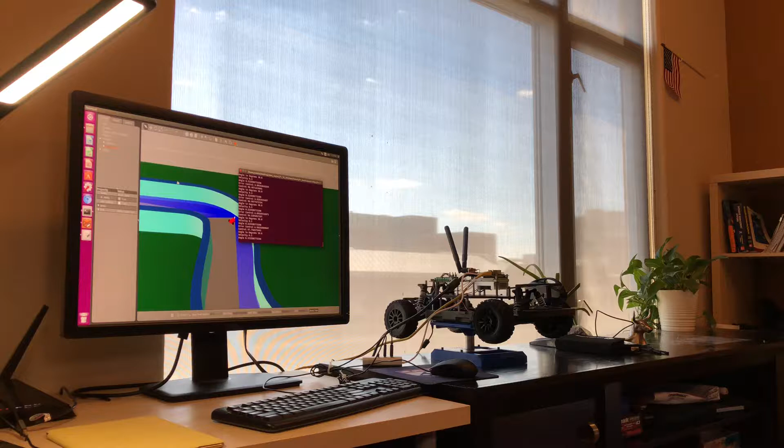Hi, my name is Christopher Cal. I'm going into my second year for robotics master's program at Penn. And I just want to talk about this, my first exciting week working on the F1/10 racing car.

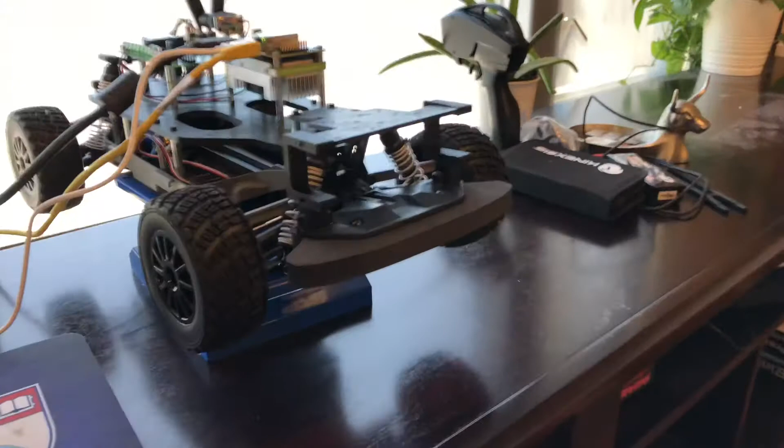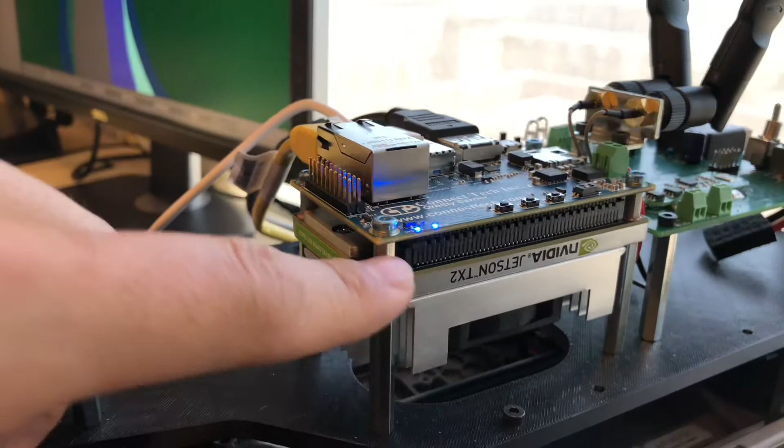So let me just show you what it looks like first. It's almost completed, but not entirely done. This is the F1/10 racing car right here. Basically it's using a Traxxas chassis on the bottom, the Traxxas Rally 4-wheel drive. And then on top of this, we have an NVIDIA Jetson TX2, which is this, and here's a carrier board on top.

The TX2 is about $600, my education discount is about $300. The Orbitty board is about $200, which allows you to plug in HDMI and stuff, and you actually see it on the monitor, which is super cool.

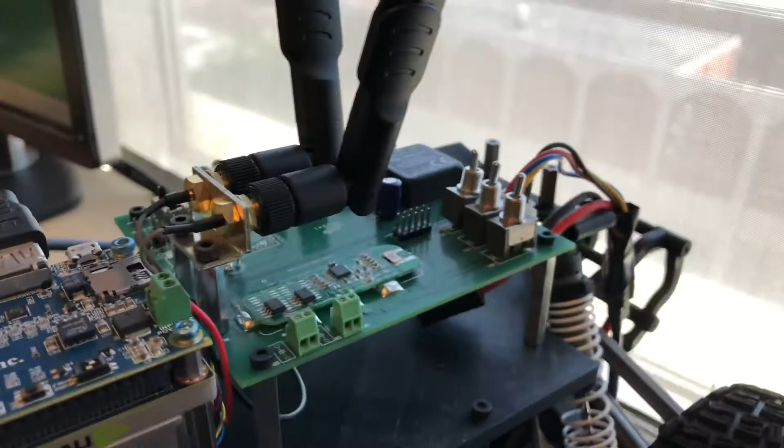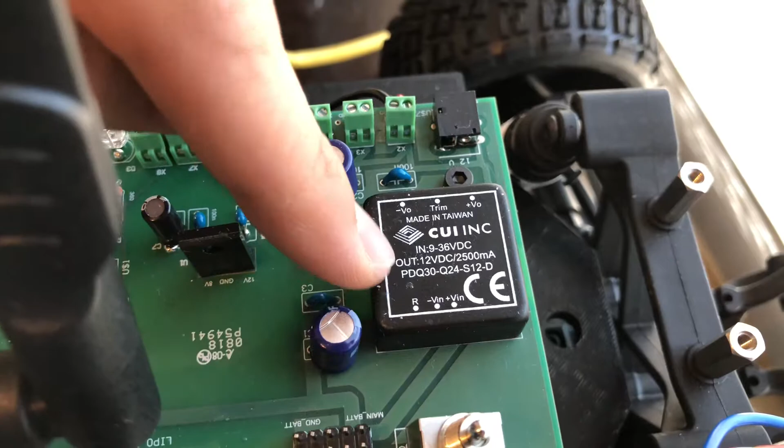Over here is a power board, which was soldered by members of the F1/10 team. Essentially what a power board does is it takes in power from DC, from a battery. In this case, I'm doing it from a wall plug, and converts from anywhere from 9 to 36 volts to 12 volts output. The reason why you need 12 volts is so they have a steady stream to the Orbitty carrier and the NVIDIA Jetson board.

On a normal battery, it's supposed to last about 6 hours for the computer. Although sometimes it's 3, sometimes it's more, so it's better to just plug it into the wall for debugging purposes.

So I wanted to just talk a little bit about some of the things that I've come across, some of the challenges. I've literally prepared this entire list of things to talk about just because it's very overwhelming sometimes to think about all the things that F1/10 is.

But before we get to that, let me just show you a little bit about what F1/10 is and why I got interested in this. Right now, by the way, is mid-June of 2018. So I'm on campus over the summer and got the opportunity to join the team.

The bill of materials for everything can cost up to $3,000, but the LiDAR camera is about half of that, and I'm not planning to use one of those.

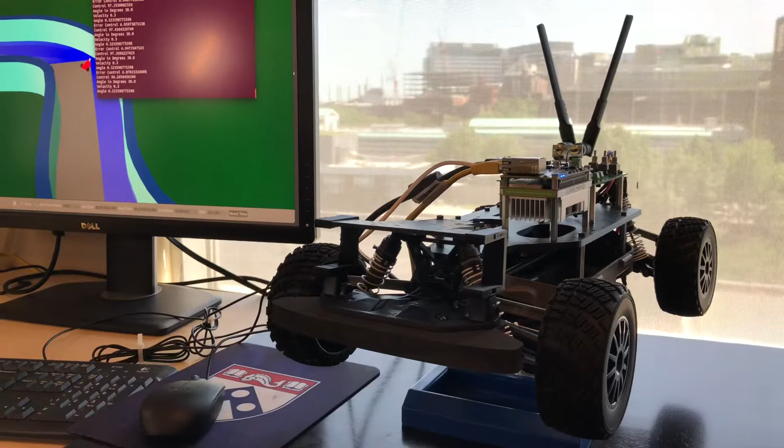What I was really interested in was I was at an NVIDIA talk where I heard researchers putting a camera, just a single RGB like webcam, kind of like this type of camera, right on top of the car, and basically training a neural net. So the car would be going at constant speed, imagine that, and you just store, when you train it, how many degrees to left or right given the single image.

And this was a project called Dave, made about 10 to 15 years ago in the early 2000s. It's been very successful in the backyard. And NVIDIA sent in with the actual car. They've actually trained it on about 100 hours of driving in all types of weather conditions, and they've actually gotten it to work.

In their case, I actually talked to one of the researchers there over the phone a couple weeks ago. And they actually did need some more sensors, like sonar in the front in case someone stops. They had a separate sensor for detecting stop signs. So it was not as simple as it may seem, because there are a lot of other things as well.

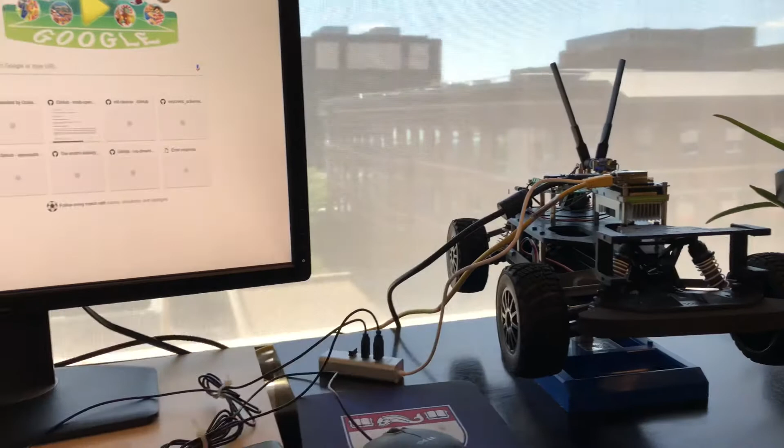But it's just very interesting for me because as a robotics student focusing on a lot of computer vision and machine learning, it's cool to be able to actually see it implemented in the real world as opposed to just like numbers on a screen when we do these machine learning projects.

So let me show you a little bit about what this simulator is. Basically, this is a simulator using the Robot Operating System.

Before I get there, let me tell you what's on this NVIDIA tech board. It took me about a week to build. I bought the chassis last week when I was home in California and brought it over. I was so excited, and I've had a couple of Traxxas cars before, so I know how much of a pain it can be to fix when it breaks. These are called caster blocks and other parts. When they break, it's such a pain to fix because you have to take apart so many pieces.

So that's why I don't want to drive the car yet using any software. One, I'm just starting to learn ROS. Two, I'm definitely going to make a ton of mistakes. And three, it's going to be a pain.

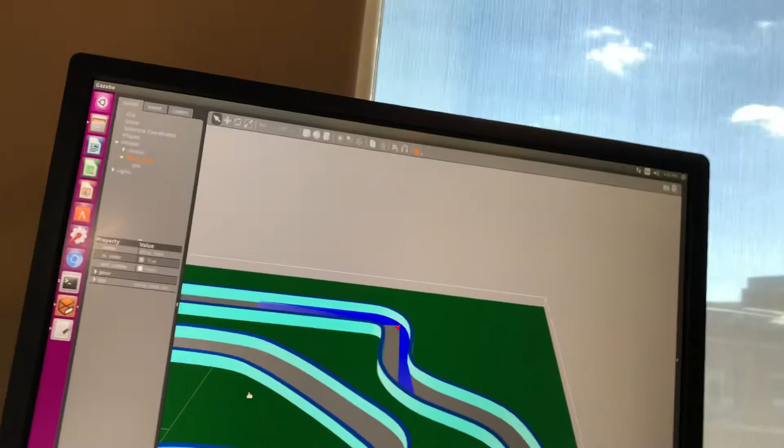Even here, if you look at this, this is literally a simulation, and actually the car crashed after a couple minutes. This is just doing simple wall following using Gazebo, which is part of the ROS operating system. It's a simulation tool. This is like a Barcelona track, and you're able to see around while the car runs by itself.

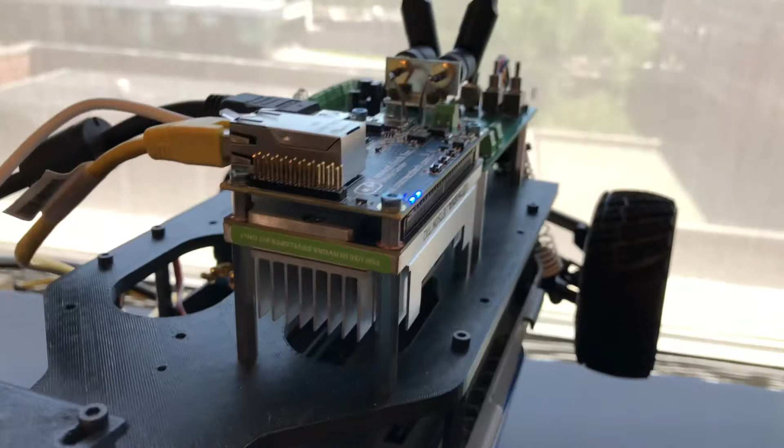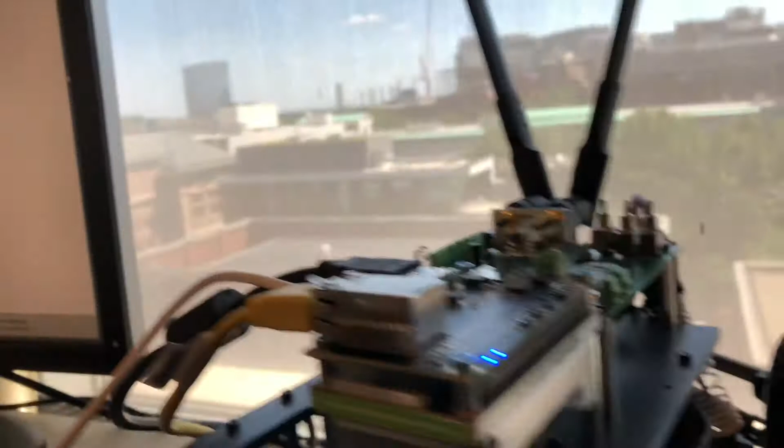In terms of what I'm doing about ROS, this is basically what it kind of looks like, and again this is very simple still. This is running Ubuntu 16.04 LTS, using ROS Kinetic, which is a slightly newer version, not the newest, but newer than Indigo. I was very worried about compatibility issues because I'm using the TX2, and a lot of the tutorials I found online were all for the TX1, which uses 14.04 with Indigo. So I was worried about that, but it seems to be okay so far.

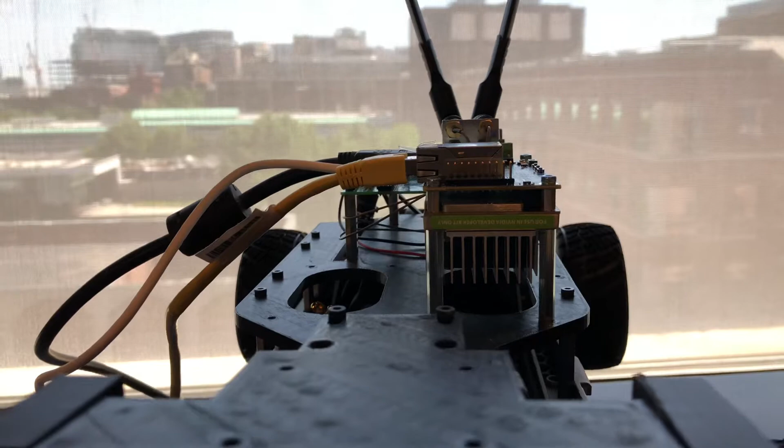It's just been so cool. At least for me, coming from a background with a lot of computer science for undergrad and mostly programming, I haven't learned soldering skills, I don't know how to use a laser cutter, and I'm learning all this stuff now. It's just cool to be able to combine things together and actually do something cool with computer science outside of just data structures.

They can be run with either Python or C++. I'm really happy if I can do stuff in Python, because I haven't done much C++. I've done a lot more Python coding, and especially later if I want to do the neural network type of thing, I'll probably need to write in Python, not C++. So that's just really cool.

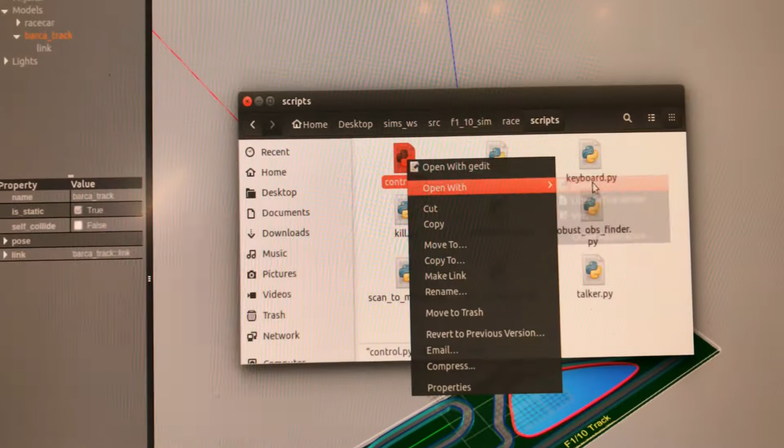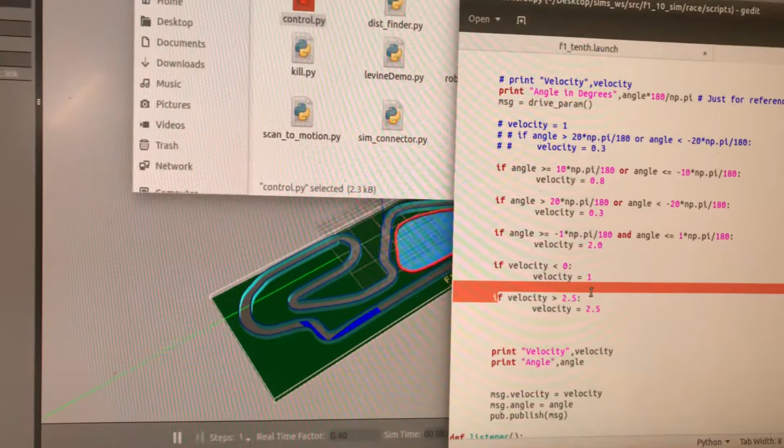If you look at a file like this, it's all on GitHub, so nothing proprietary. Control.py is like, how do you control the car? I still don't understand a lot of this, so I hope it doesn't sound like I do, but control seems a little hard coded. It's like, if the angle is greater than that, then do that; if the angle is less than that, do that. If the velocity is... this is actually commented out... if the velocity is greater than 2.5, basically you set a maximum velocity of 2.5.

There's just a lot of little things in here, and I guess it publishes a message. In ROS, the robotic operating system, each node publishes messages to a topic, and you have listeners. So I guess this would be considered a node, the control node, because it's publishing messages with a velocity and an angle. In many ways it's kind of like JavaScript, because you're having like a JSON. You're setting a velocity, setting an angle, and then publishing it, which is kind of like a POST request, and then you have someone getting it, like a server doing a GET request.

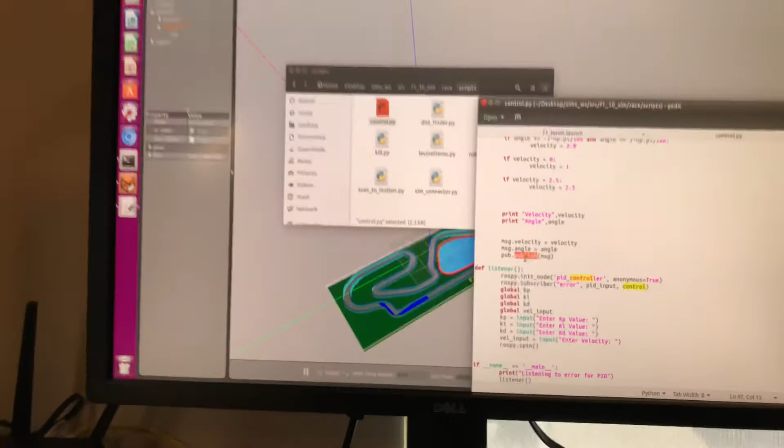So this is super cool. I want to show you a little bit about how the terminal stuff works. This is just running the simulator right now. But something I found pretty cool is that in ROS, every time you start it, you have to run something called roscore, so I ran it up here. It's basically like the master server that helps all the different nodes communicate with each other. This is all stuff I've learned this week.

I literally have this stack of papers on my desk. I'm just learning a lot, and sometimes it's overwhelming, there's a lot of stuff.

The F110 website was great because it had a lot of tutorials, so I went through basically almost all of them: Intro to ROS, look at those notes, Intro to the Jetson which is the NVIDIA board, and Robot Operating System part 2, using nodes, catkin make.

These are a lot of papers that I found pretty interesting. I haven't even read all of them yet, I've only read like one of them to be honest. The one I've read is the NVIDIA paper, I'll see it right here - it's the end-to-end learning car one, but it's not this one. I'm not exactly sure where it is right now, but I'll try and find it later to show you.

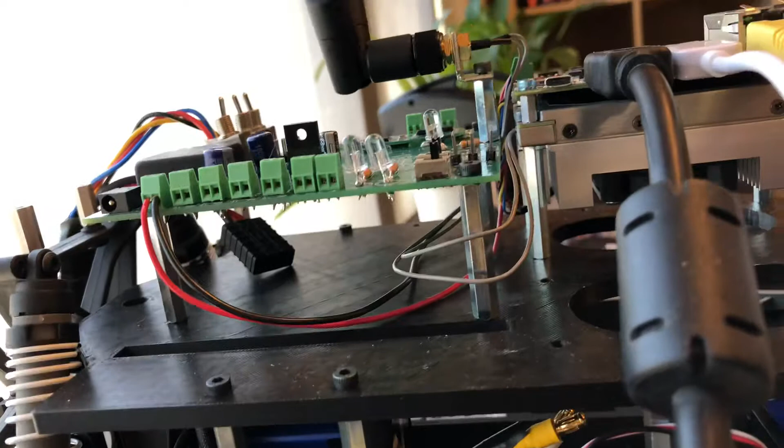You look at the hardware here, it's really interesting because we actually stripped out a lot of things. It's using a brushless system, and it's best to use brushless because it has 3 prongs, which works with the VESC. A VESC is basically an electronic speed controller. I'm still waiting for mine, and I'm in no rush because I don't want to drive this anytime soon in case it crashes. But a VESC basically allows the board to communicate over USB, probably through a hub or something, because it only has one USB port, in order to get odometry information, tell it things.

It's being used by electric skateboards, like the boosted board. It's used in a lot of new technologies, it's supposed to be a big breakthrough, and I don't really understand why yet, because it seems like the VESC is something that we should have had a long time ago. But I guess with the advent of these microcontrollers, it's just made it more possible to send very fine-tuned messages.

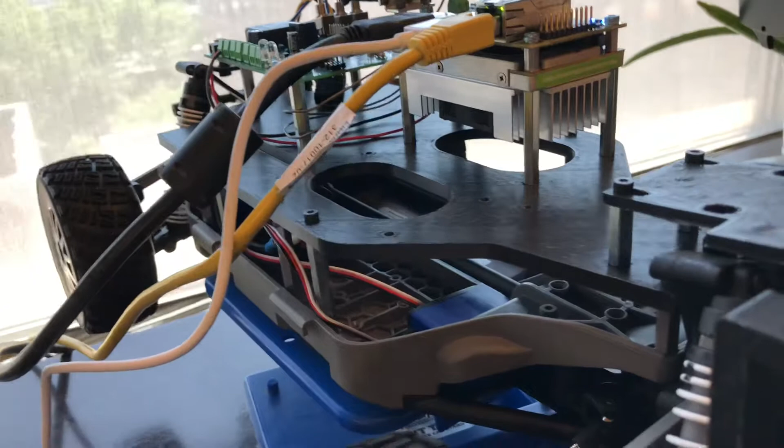So we actually took out the receiver, and my friend Jack actually helped me out. He's the same year as me, also going to sub-matriculation, he's helped me out a ton building this. These were 3D printed, and normally they're laser cut, but I was at Penn, had an ad lab, and got it printed, so that was cool. This one I printed at home because I got my little brother a 3D printer, and I printed it last week when I was in California because I was just dying to build this.

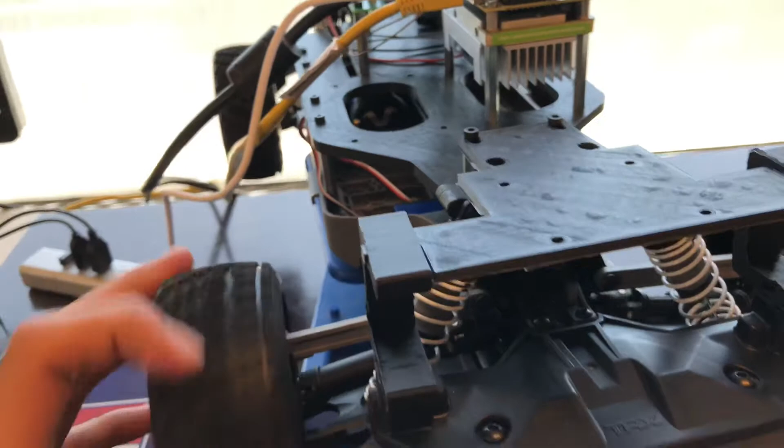So you'll see here, we took out the original electronic speed controller, don't even have a need for this because the receiver is stripped out. And the way for people to manually override when this is driving is, instead of using something like this which you can use a computer to control, we will actually use one of those gaming joypads by Logitech, which is in the lab right now, and use that to drive this. The bottom is a really cool plate which allows me to just turn the car.

If you really just step back and think about it, how cool is it that our car is a computer that is driving a car that is simulating? It's insane. Some team members have told me not to run the simulator on the TX2, but so far it's working pretty well. This computer's got 8 gigs of memory, it's pretty powerful, and it has CUDA cores, and honestly I think it's probably more powerful than my MacBook Pro, if not around the same. So I think it's pretty damn impressive.

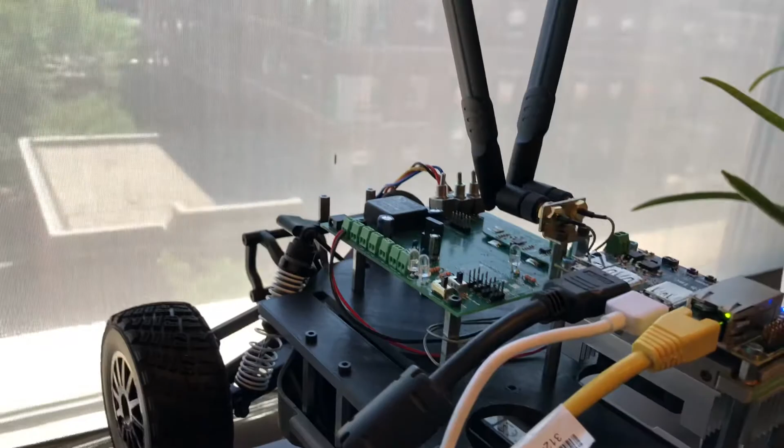So this is the simulator, let me just minimize this. Basically show you this - it's funny because when the car crashed, it actually keeps going like that. But let me put the camera down and just talk you through some of my thoughts, some of the challenges that I've seen. It's about 12 minutes into the video, but there's a lot I want to talk about. Let me just make sure it's going correctly.

So I just want to talk a bit about how excited I've been this past week. Literally a week ago, or 2 weeks ago maybe, I was in California just driving normal RC cars, Traxxas models, which I've had for a long time. And this summer I was planning to continue doing my drone photography with Philly by Drone, but I was feeling very bored and a little empty inside because I've been taking so many robotics classes and I wasn't applying it in any way. And I know that next year I'll be taking about 4 master's classes a semester, where normally students take 2 or 3, plus I have some undergrad classes.

So it's going to be a ton of work, and so I wanted to get a head start. I debated about maybe doing some research over the summer.

Maybe some research just to get a course credit for the engineering thesis for my undergrad. I was lucky enough to find out about F1/10th because I saw it in February at a conference at Penn, an industry symposium, where I also met those NVIDIA researchers doing the self-driving car. I just thought it was really cool because it's a way to apply a lot of the things I'd learned.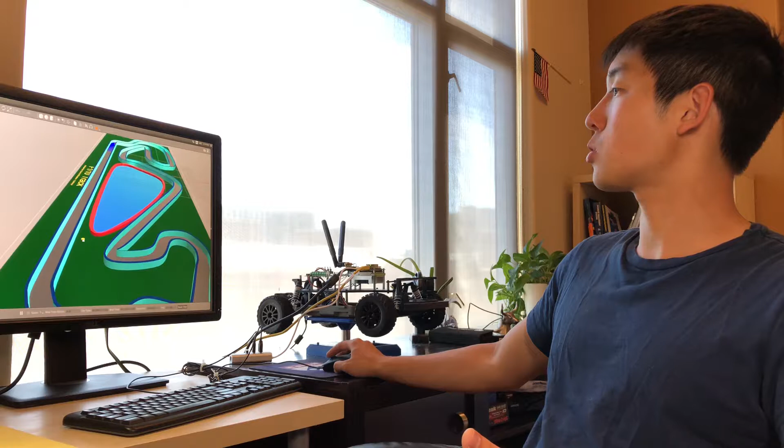Which, by the way, is really cool — you can just input a world into it and tell it how to go. When I showed you that simulation earlier, the fact that you can just run that is going to be really powerful, because for a course where students are implementing algorithms for the first time, I don't think we want them driving the car down hallways — especially since these cars with LiPo batteries can go up to 60 or 70 miles per hour. Something goes wrong, it can even break someone's foot, which is crazy.

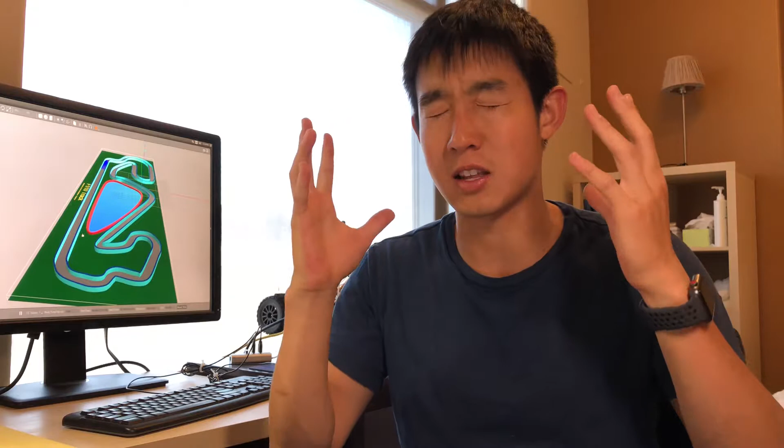So in terms of simulation, there's so many things I don't know, and I'll just name-drop all the things I don't know because it's almost overwhelming sometimes. Let me make sure it's still recording.

So some of the things that are really confusing to me: first, when I run the simulation, what are all the nodes? How many nodes are even going on? I have no idea. There's a control for the car, the ESC electronic speed controller might have one for the VESC, turning and steering, maybe the laser scanner sending stuff, and all these topics being sent - it's crazy. When you do the graph, you get a full screen with like 20 or 30 different nodes.

So I really need to spend time to sit down, visualize it all, see all the topics. It's crazy, and then you can echo each of them to see all the data being sent, which is just crazy. And that's just a simple part - that's not even the car running yet. That's just the software running together, all the nodes communicating with each other.

And then once I have that, I want to understand all the Python files - how do you write code even to just make the car go forward. It seems kind of simple normally - in Java, in the virtual world, you could just do karel.move, if you're familiar with Karel, the Carnegie Mellon thing for learning I did in high school. But in this case, to make the car go forward, here's what you have to do.

You have to have the control.py, which is constantly looping. You have to set the velocity at 1, but you can't just say 1 because sometimes it might get faster or slower, so you have to set if statements - if it gets greater than 1, keep it at 1, if it goes less than 1, keep it at 1. That's the simple part. Then you have to send over some topic, which is unknown.

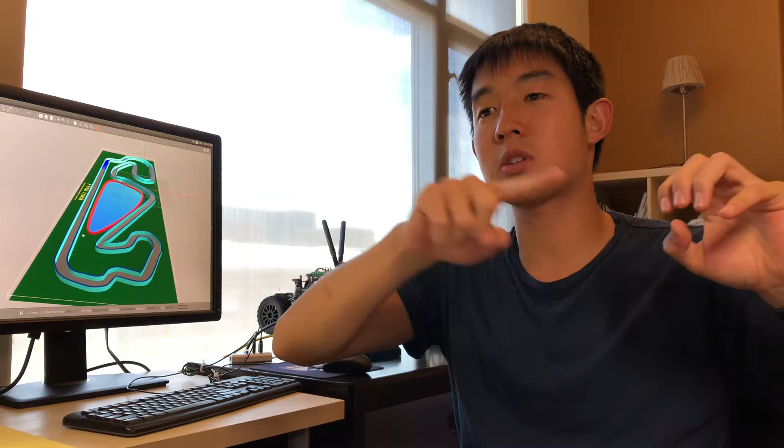I don't know what it will be called, but someone's going to be listening on the other side - probably the VESC. So the VESC then listens to say, oh, velocity is 1, okay, I'm getting this message, let's tell the robot to move. The VESC, I guess, has its own node, and it's open source, so they figured all that out. It'll then tell the actual hardware.

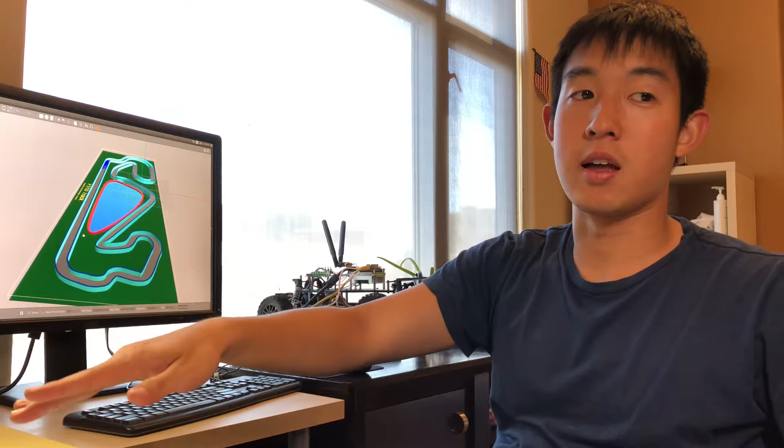To then spin this motor some certain number of times, which you have to calibrate by measuring to go at a velocity of 1, whatever unit that is. And then it just loops. There's so many parts going on. You have LiDAR sensors constantly listening, and if the LiDAR detects something 1 foot away, it tells it to stop - but it's also telling it to move. I'm just trying to process everything that's going on.

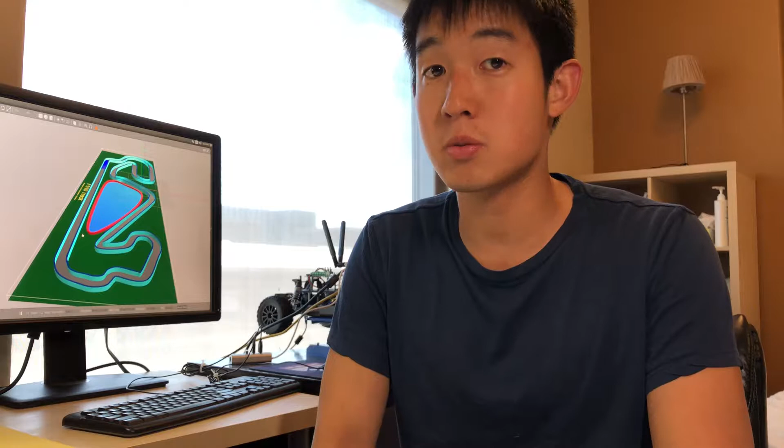And then it gets a little more confusing because that's just simply moving. But obviously to make a self-driving car, you're gonna have to have pretty smart brains. It's gonna need control and planning algorithms, which I've never taken a class in before. I've only taken machine learning, computer vision, and machine perception, which are more on the computer vision side. So I don't know any of these.

There's something called PID, which I haven't learned about before. It's kind of like when a car turns a corner - you don't want it to just go on the inside and make a wide lane, you want to go on the outside and cut a short lane in. There's all these things, and all of F1 10th racing so far has just been individual trials.

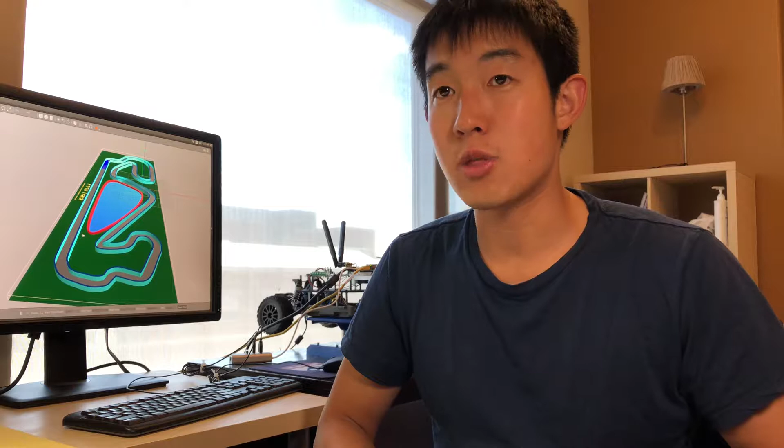So they'll have a track set up, and the car will move around. I'll show you what the track looks like, just because I think it's important to see. Here's an image of a track - this was one of the tracks at one of the international competitions. It's kind of a bird's eye view. Looks kind of small, but it's actually pretty tall, and they use these air duct tubes at the bottom, stacked 2 on top of each other.

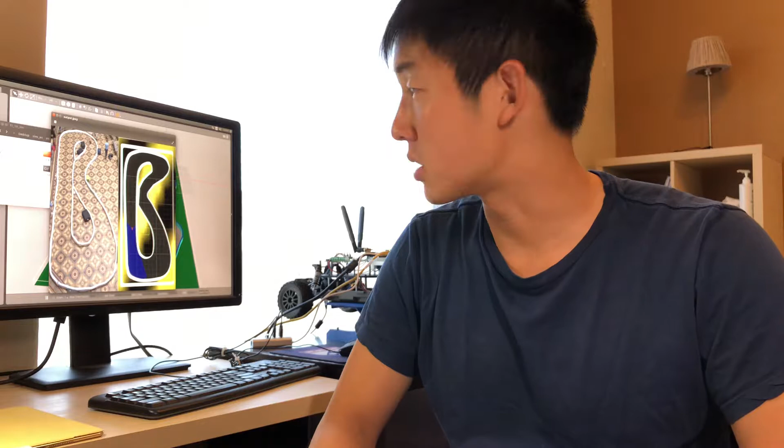Because if you only put one, the LiDAR might not see it sometimes if it's too close. So there's all that stuff. I'm going to be figuring out this week how the simulator works - I need to improve it, need it to be realistic. Hopefully I can write my own path planning algorithm - that's the plan. Then in a couple weeks, once I have the hang of how to control the robot and how to make it move, I'll start installing a sensor on, probably this RGB camera right here.

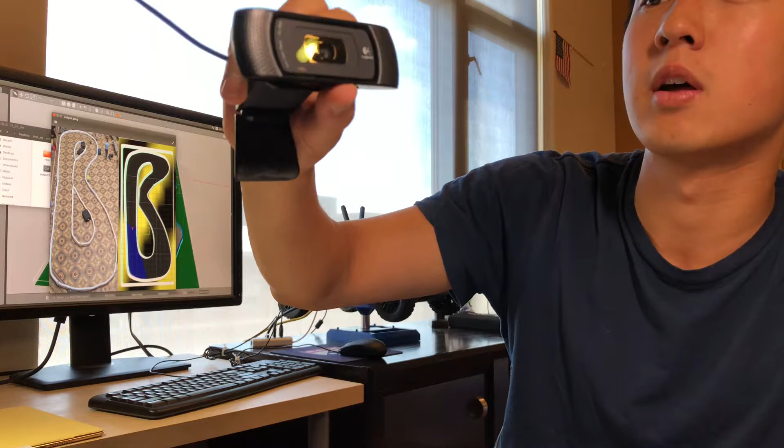Although I heard the field of view isn't wide enough, so I may be using a different camera. In my opinion, it should be high resolution, but a lot of the ones I've seen, people use really cheap cameras. To me, I feel like it's really important to have a really good camera, because if it's the only sensor the car's using - especially coming from a photography and drone photography background - I feel it's important to have a pretty clear camera. But you obviously can't use 4K, because a 4K camera is not going to process - it's way too big of a file. So it'll have to be downsized eventually anyways, but having a wide field of view I think is very important.

Neural networks will be a huge thing, especially because when I worked on neural networks last, I used code that was already existing and improved on it slightly. So I need to find the open source code, and figure out how to train it. I guess I'll probably be using that little Logitech joystick thing to train it. A really good tip I got from Ben from NVIDIA was to start something very simple, like going around the table. So I might just train the car and spend like an hour driving it around the table. I don't know if I should do it in both directions or just one, because I might confuse the car - probably one direction, going a constant speed of probably like 1 mile per hour.

It has to be constant, because if it speeds up, the turning orientation actually changes things. So it'll just go around the table, and I'd load all those files in - they all have to be downsized. I need some script that's literally saving all the data - every single image frame is going to be saved, and you know how big images can be. If we're talking 24 frames per second, or maybe slower because maybe we don't need every frame - even at 2 or 3 frames per second over an hour, that's literally like 10,000 images.

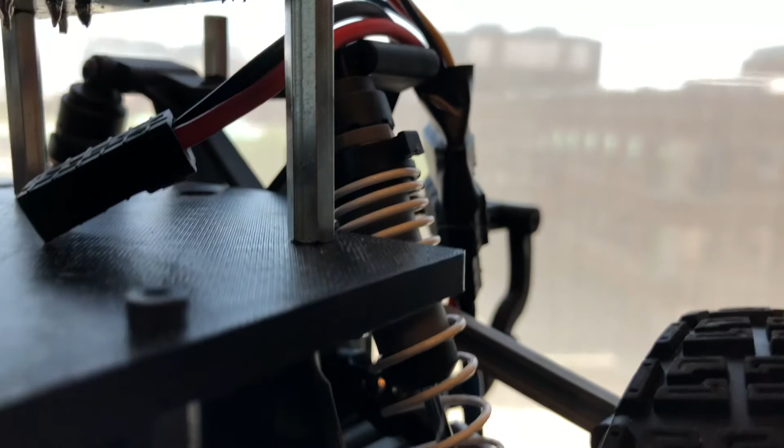Just to conclude, let me show you a little bit more of the car, because I know it's really cool - just in case anyone wanted a clear view of it. This is the car, it's super cool. This is the board, which Jack soldered, and I was just sitting next to him watching - I've really learned a lot. There's a brushless motor, there's the shocks, which actually need caps on them to compress the springs because the car's heavier now, so it sags more. It's gonna be really cool.

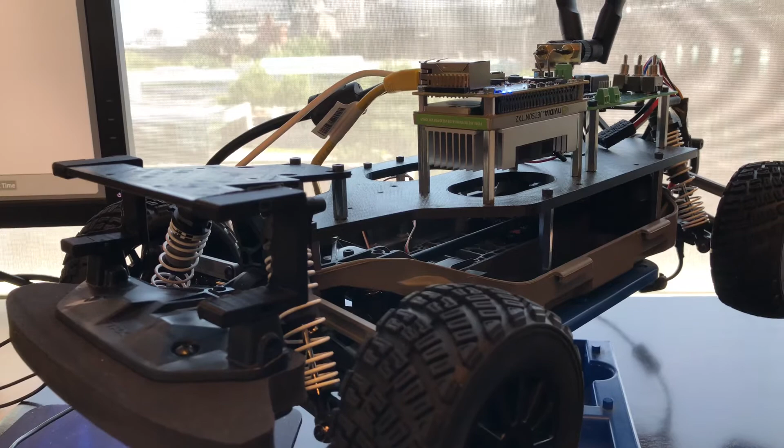I have about 2 months before school starts, so that's about 8 or 9 weeks to really get this up to speed. Eventually I might be TAing the course, might get course credit, and it'll be cool. This is stuff I definitely wouldn't know how to do in undergrad, and doing a master's really exposes me to a lot of new things. So just be humble and we'll learn a lot. Thank you.